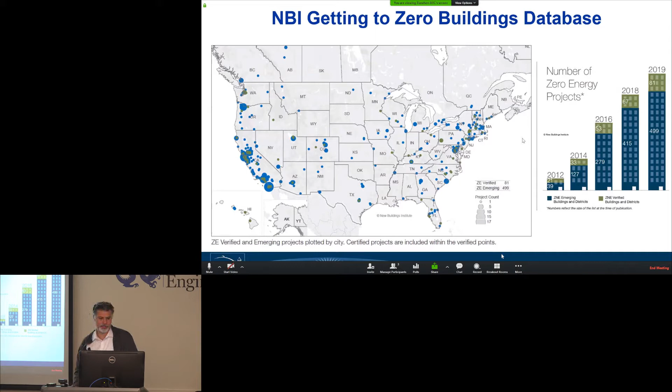So with that, I will hand it over to Dr. Hong. I realized I forgot to unmute myself, so he didn't hear anything of what I just said. Apologies. Does that mean the YouTube folks didn't hear that either, or did they hear it? YouTube heard it, okay. Dr. Hong, I apologize, I forgot to unmute myself when I did the introduction. So I just finished your introduction and you're up. If you will share your screen. Yes, let me do it. Okay, you're all set, I'll hand it over to you. We're not seeing your first slide though. There you go. Okay, it's all you.

Thank you for this opportunity. I'm Tianzhen from Berkeley Lab, and I'm happy today to share some of the research we've been working on for the last couple of years, focusing on how we get buildings in cities to be zero net energy. I'm sure there will be some questions and synergies between our research and the work Janet from NREL will be presenting later. These are funded mostly by Department of Energy's Building Technologies Office.

So if we look at the history, looking at the evolution of the built environment, you see some pictures here. If we start looking at the igloo, basically it's not electricity or natural gas, right? You still get energy from the sun, but it's really zero net energy. It's not a building per se, but it's like a shelter, right?

And then going down, you see a donut-shaped building. It's an ancient building in China. I think it's also using very less energy, using a lot of passive design, thermal mass.

But if we move ahead to the middle, the modern buildings, right? These have the vegetated green roof, very open space, try to use daylight and natural ventilation. So these are the high performance buildings, getting to the platinum or gold ratings.

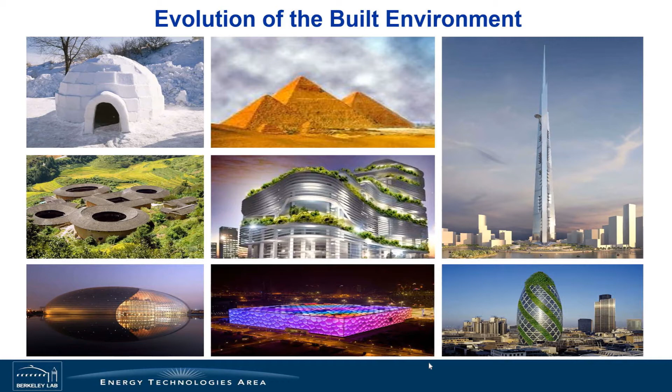So as you can see, buildings, all the shelters, evolve from very simple to very complicated, providing very sophisticated services for humans. And we are basically now asking the same question: can we design, operate these buildings in a net zero energy way, right? So that's a big question, and I think there's a lot of examples.

New buildings have been constructed and operated, actually achieving the zero net energy goal. This is a database compiled by New Buildings Institute, with data from 2012 all the way to 2019. Of course the 2019 data is not completed yet, but you can see there's almost 500 buildings, right, that achieve—or some maybe a couple of buildings together as a campus or district that achieve this zero net energy performance goal. So basically this is telling us it's a possibility.

It's for different building types across all the U.S. locations, different climates. And most of these are commercial buildings.

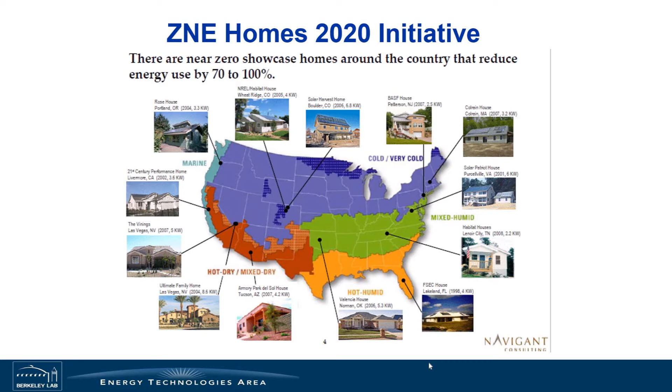So when we move to the residential buildings, right, Navigant also has been compiling a database of these new homes, either single family or multi-family, built across different climates in the country. And these are all zero net energy homes, right? So commercial, residential, we all have the examples, basically telling us that technologies are already here today, and we have those buildings.

But I guess the real challenge is, well, how can we scale them up? So take a step back, looking at a definition of zero net energy buildings.

And I think interesting things here, some are in common and some are differences. I think what's in common among the different definitions of ZNE buildings is they're all calculating the energy on an annual basis. So basically, we are saying a building is ZNE means the energy consumed, right, on the annual basis equals the energy produced on site, also on the annual basis, right? So that is all the common definitions.

But then when you go to the actual metrics, I think ASHRAE is using the site energy, which basically counts one equal unit of energy from all resources as equal, right? And the U.S. Department of Energy is using source energy, which basically values electricity at about 3 times the natural gas in terms of equal unit of energy.

In California, we are using time-dependent valuation energy. So basically it values every hour of energy differently, depending on whether it's commercial, residential, electricity or natural gas, and also varying by climate zone. So it's a more complicated metric, trying to consider some of the life cycle influence of energy.

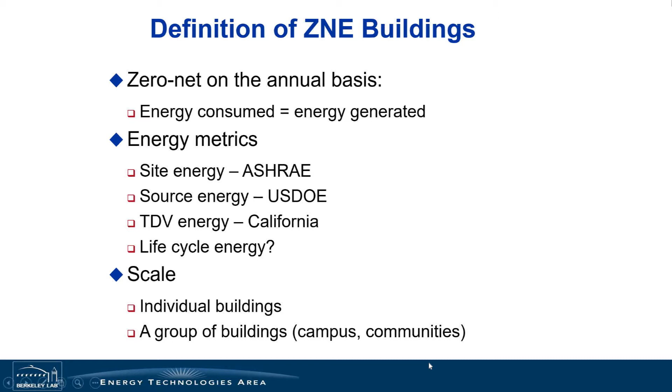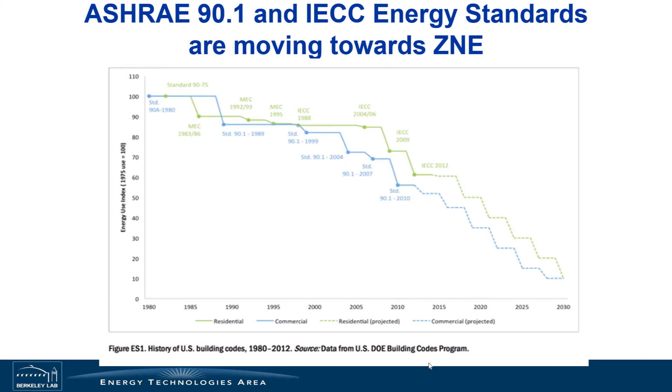On the residential side, the IECC is doing something similar. They're also tightening up the residential code to ensure that the code will get to the ZNE goal by 2030.

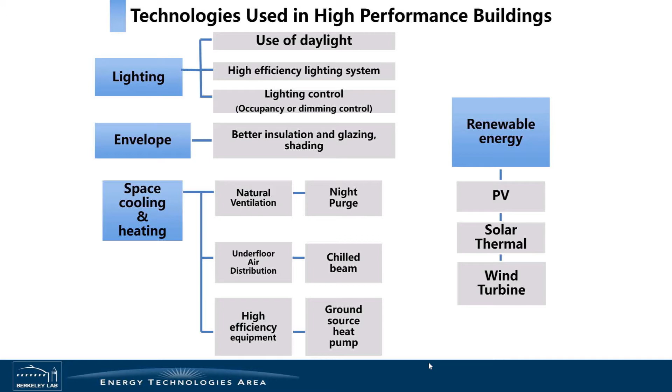I think these low energy cooling systems are quite popular in these kinds of high performance buildings. But of course, high efficiency HVAC equipment is also used, like high EER rooftop units or high COP chillers. On the renewable energy side, a lot of buildings are using solar photovoltaic, some are also using solar thermal, and some, with limited examples, use on-site wind turbines. So these are nothing new in terms of technology.

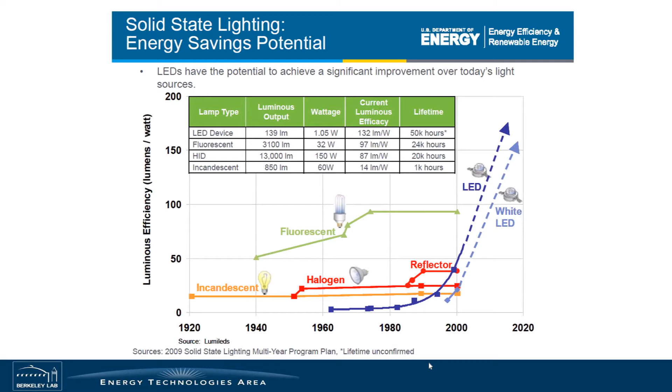On the HVAC side, this is just an example from Mr. Lee, an energy efficient engineer in Singapore. I think it illustrates very well the comparison between a conventional design and state-of-the-art design of a central chiller plant. The chiller efficiency in a conventional design may be 0.75 kW per ton, but today you can actually buy a chiller with better than 0.5 kW per ton. That's the technology.

Then for the air handling unit, this is more like the design of a low pressure loss air duct and fan system, so you can basically drop from 0.6 all the way down to 1/10, to 0.06. Same thing for the chill water pump, condenser water pump, and the cooling tower. The very bottom sums the total kilowatt per ton. Conventional design is about 1.75, and with state-of-the-art design we can get to 0.6. That's almost 1/3 of the conventional design, and this has already been implemented in many projects and real buildings. So it's just some dedicated engineering that enables us to have a much more energy efficient HVAC system - in this case, the central chiller plant.

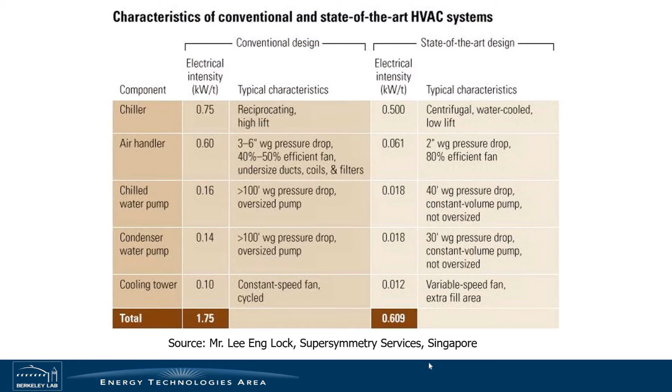The other perspective is that quite often in building design, these are different disciplines - lighting, architecture, HVAC, and daylighting - that seem to be done by different teams with very limited communication. I think the interactions between these disciplines are very important. So this new way of thinking in the design process is to use integrated design - basically getting everybody on the same project together, and considering interactions between all these different disciplines. One example: if you have a very high efficiency lighting system, obviously heat gain from the lighting will be much less, and that has implications on how you size HVAC systems, what type of HVAC systems to use. So this kind of interaction needs to be considered in order to optimize the entire building performance.

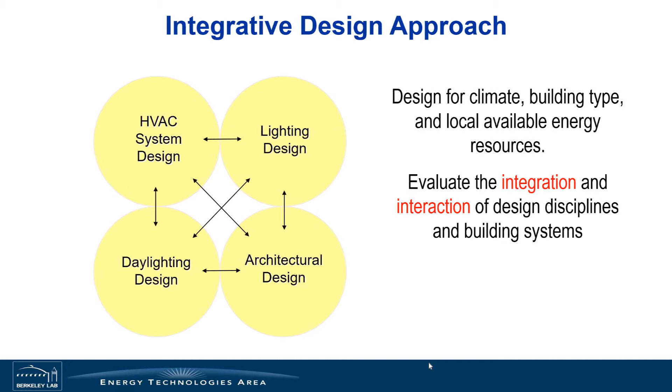Most of you may have already seen this diagram from the New Buildings Institute. Basically each dot is one building, and it compares the design energy use intensity with the actual measured energy use intensity. The dots are everywhere, but for most of them, on average, it's not too bad. But there's a right triangle highlighted here, and these basically are the low energy buildings we are pursuing. Unfortunately, for these buildings, the actual energy consumption is higher than the design, which poses a real challenge for us. How can we design these low energy buildings so that we can achieve the actual performance? So let's look at how these different factors influence the way we do energy modeling.

I think I just listed a couple of things here. The occupancy is important, how the building is operated and maintained. Earlier I mentioned occupants' behavior, the actual building controls, and the actual equipment performance, right? Equipment tends to have some sort of problems here and there, so that needs to be corrected, needs to be maintained, right? And weather data, what kind of weather data you use to do the simulation, right?

So are you using the year that you measure energy use? Sometimes that can be an important impact as well. And the last two things, yes, the way you make assumptions and simplifications to create the energy model, right? And also the tools you use to do the simulation, depending on how complicated your technology or your design is. The tool itself may have some approximation, sometimes there may be a bug somewhere.

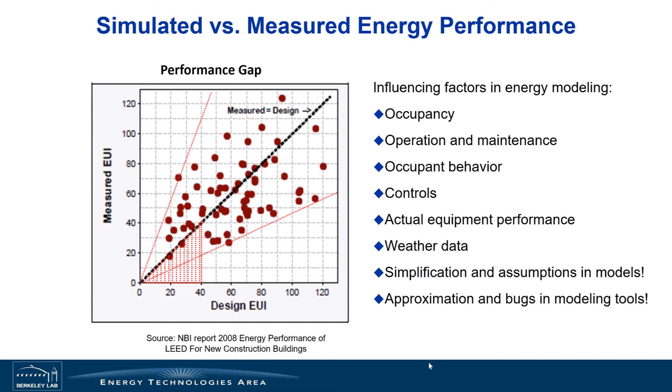So all these factors contribute to this performance gap, if you will. I think some we can easily find out and control. Some are a little bit more challenging. So to tackle some of these issues from the International Energy Agency's point of view, there have been a few projects that try to take a deep dive into some of those issues. And the first one is Annex 53.

So basically, you look at the actual energy performance, categorizing its influencing factors into six. There's climate, building envelope, building equipment, operation, maintenance, occupant behavior, and then there's also indoor environmental conditions. Buildings are operating with very different settings of indoor heating and cooling temperatures, right? And outdoor air ventilation rates. So those also have significant influence.

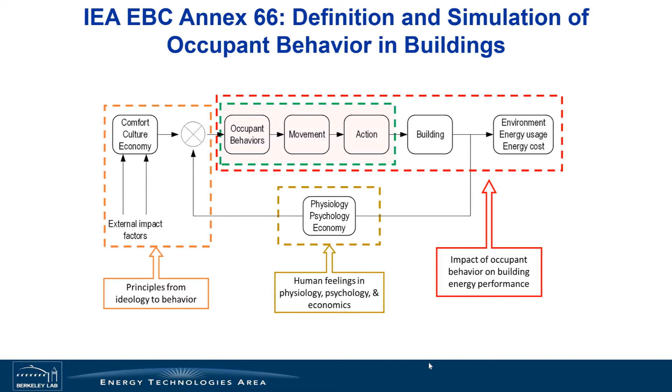So a more recently completed project is Annex 66. This is particularly focusing on occupant behavior in buildings. It tries to get data, tools, and develop some case studies and best practices to capture occupant behavior and integrate it in the way we simulate buildings' performance, and try to improve the way we evaluate technologies, considering how different people would interact with technology in different ways. So there's another IEA project.

So I want to have a couple of slides just to illustrate simulation's role in supporting the design of ZNE buildings. Simulation can be used in different phases of the building's life cycle, right? In the early design, it tries to inform some of the early design decisions, including the site, the geometry factors, and those kinds of stuff.

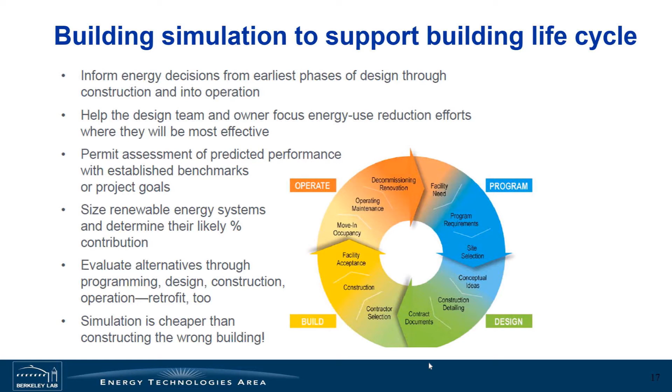And then going down to evaluate some of the system trade-offs, like system type, determining what kind of renewable energy, what kind of glazing system, right? For example, in the San Francisco microclimate, is double glazing always better than single glazing? Those kinds of design decisions can be evaluated early using energy modeling tools.

So as we are part of the National Lab of the Department of Energy, we have been working on this tool called EnergyPlus, and this is a national effort. NREL is also part of the team developing EnergyPlus. It's a tool used to calculate all the heat and airflow in buildings and simulate the energy performance, which is used for code compliance of new buildings, as well as evaluating technologies for retrofitting buildings to reduce energy use. It's a tool that has been there for the last 20 years.

So it's beyond just the total amount. It's about when the energy is consumed, that kind of flexibility. Can you consume more during certain times of the day and consume less during other times of the day? So that demand flexibility is now getting very important. Those are what some of our new research projects are focusing on.

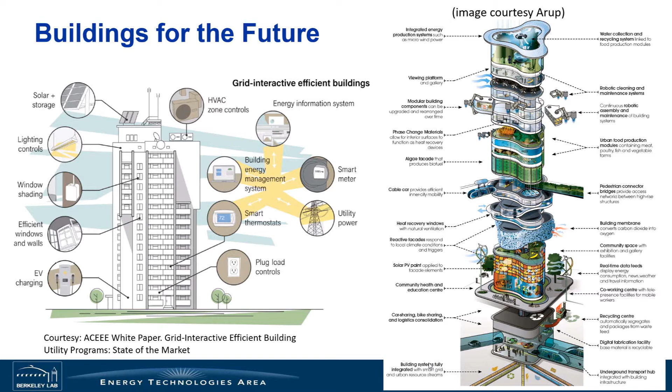On the right side, I think this is just an imagination of buildings in the future. It's more about a combination of different types of technology integrated with production of food, also transportation, integrated in a 3D dimension. I think it's very interesting thinking. So let me scale this up a little bit. So we're talking about one building, right?

But if we look at a city, right? So for example, New York City has 1 million buildings, so how can we do those kinds of energy retrofits or new designs, right? So there's a city energy profile project that basically looks at the energy consumption in cities. And as you can see, buildings consume a significant portion of the total city's energy, from 30% all the

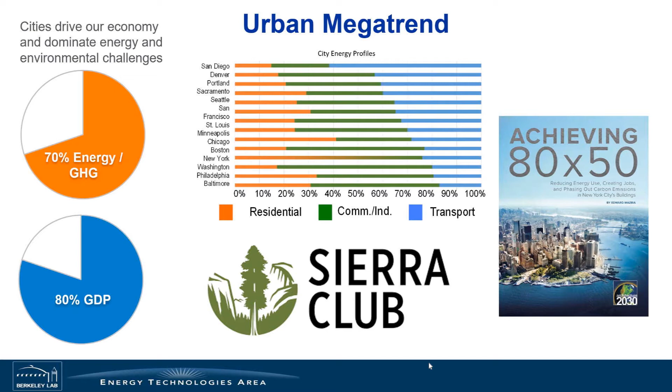way to 70%. Right, and so I think one of the key areas when cities talk about getting to 100% clean energy is to look at efficiency programs for the buildings sector, right? So there's a Sierra Club initiative; more and more cities are signing up for 100% clean energy by 2035 or 2040, right? Okay, so when we model buildings in an urban context, it's no longer just very simple and linear, where I model 2 buildings instead of 1.

I think one of the important sciences we are working on is looking at the interaction between buildings. If you're looking at a very dense area in a city, right, these are buildings on both sides of a narrow street. They have very strong interconnection in terms of solar shading, in terms of the long-wave radiation between those exterior surfaces. So we are considering this kind of interaction.

We are also considering how the building is connected to your local climate, right? Most of the time in simulation we're using the weather file from the airport, which can be far away, but your local climate can be very different. Sometimes we talk about it as an urban heat island. So we need to consider this.

And then from the other perspective, buildings also influence the microclimate, right? Buildings release heat through different channels, as illustrated in this figure here. There's convection through the building surfaces. Through the cooling towers, if you have one on the roof, through the rooftop unit, the exhaust air, and then of course there's also the exhaust air from spaces like kitchens, cooking, and some of the ventilation needs.

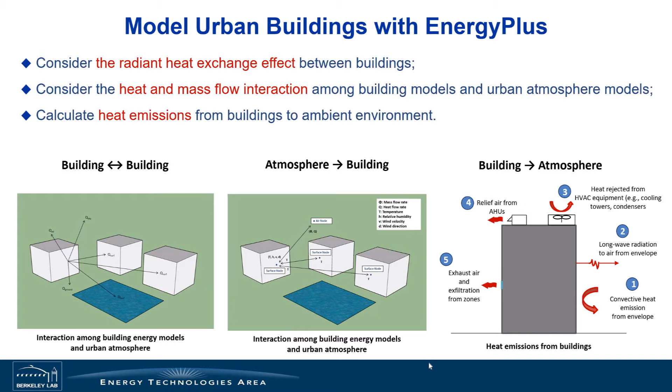So buildings release heat to the environment, which influences the environment's temperature and humidity, right? And vice versa, that further influences the energy demand in buildings. So it's this kind of interconnection we try to quantify in an urban environment. So we did some simple simulations to look at how strong this kind of impact is. And this is just a simple case study.

So this slide shows how we calculate heat emission from buildings, and we added this as a new feature to EnergyPlus. So now when you run EnergyPlus version 9.2, there's a summary report that reports all these heat emissions from buildings. And of course, it depends on the type of building. They have very different seasonal profiles. So I just want to highlight a couple of points in this particular slide.

So for a small office building, this is a single-story office building, right? The annual heat emission is 2,300 megajoules per square meter, and the site energy consumption is 621. So basically that is a factor of 3.7, which means for 1 unit of energy we consume in the building, we emit 3.7 units of heat to our environment. So it's a very significant factor.

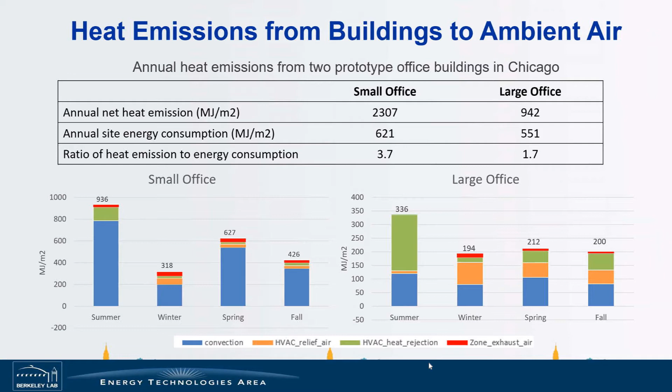So we have been working on a tool called CityBES, and this is basically trying to put all the data together to enable us to model every building in the city.

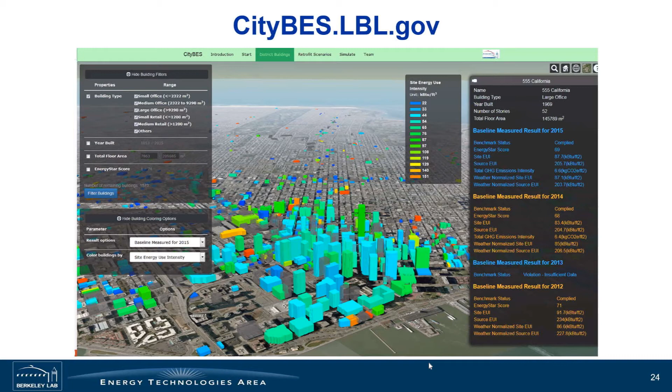So I think this approach is a little bit different than, later Janet will talk about how the ComStock and ResStock model buildings in cities. They just work for different use cases. So I'm going to give you a couple slides on this. So I think the first step is to create the building stock data for cities. And so I illustrate in this workflow, we try to get all the public domain data from cities.

There's a building footprint. I think the good thing is that Microsoft just released a public data set of building footprints for every building in the United States. So we're talking about almost 120 million buildings of footprint data, right? And then the detailed land use data about building type, vintage, number of stories, all the things, can be obtained from other data from the city.

Assessors records also sometimes have the data, and sometimes cities also have an energy disclosure program that has the actual energy consumption data for some of those buildings, public buildings or larger commercial buildings. So we basically massage the data, create a database, and standardize it using the DOE's BEDES. It's more like a data dictionary, right? Try to clarify the definition, and then produce the data in different formats to be used by different tools for different use cases.

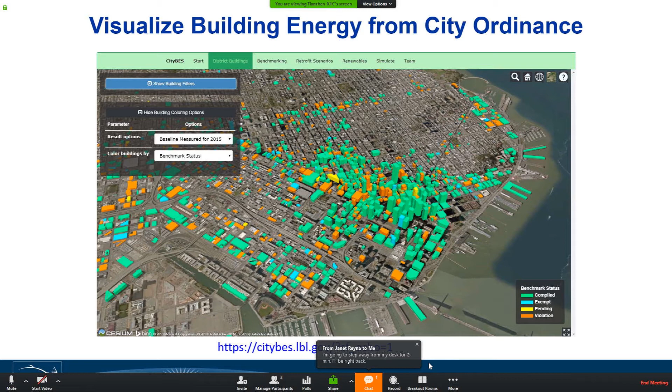So this kind of tool can then be used to visualize performance at a city scale. And this is just an example. We took San Francisco's disclosure data set. It's about 1,600 buildings, and this particular slide visualizes the compliance status. The orange color shows buildings that are still violating; they are not compliant yet. The green ones are those that have already complied. And so you can visualize different metrics. It depends on what kind of data you have.

We can then evaluate the solar photovoltaic potential at a city scale. So this shows about 9,000 buildings, and we took a look at different types of PV systems and also how much roof area is available for PV. You can do a quick assessment of how many kilowatt hours the rooftop PV can generate for this district or for the entire city, right? So you can color code by those things.

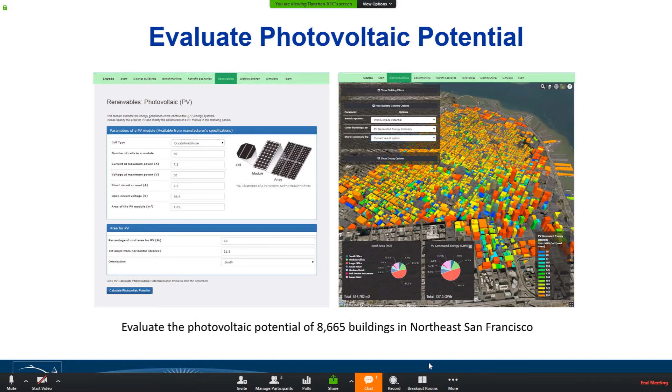And so in this kind of evaluation, I think the solar shading is very important. So we have the geometry data, so we basically consider the solar shading, right? If you have a building surrounded by many tall buildings, your roof is probably not going to receive a lot of solar. So those kinds of impacts, I think, need to be considered.

Install some plug-load controllers. Basically, turn off some of those monitors if nobody's in the office, right? Install occupancy sensors, and do some temperature set point changes, right? Not necessarily always require 24 degrees Celsius as the comfort temperature. If we can relax it to 25 degrees or even 26 degrees, there's a significant energy saving potential there.

And how about we install air-side economizers? Many old HVAC equipment don't have air-side economizers, but in the San Francisco climate, outdoor air most of the time is cool enough to provide free cooling. So if we retrofit those rooftop units to enable air-side economizers, I think there are significant savings you can get. So if we put all of the 6 measures together, these are within a payback of 5 years, we can see every building has a saving potential from 30% all the way to 50%, right?

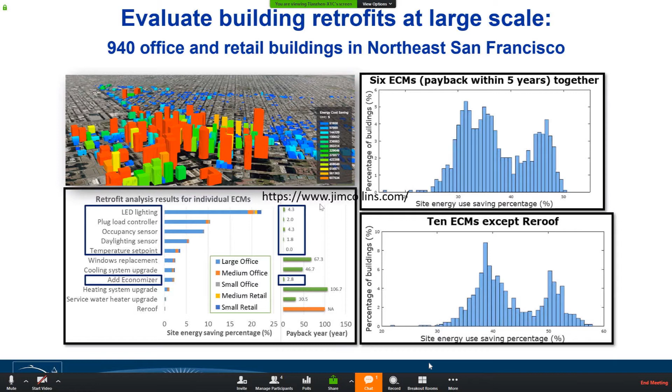So these technologies, if you think about it, are nothing new or fancy. So I think the technology is there. I think the other challenge is, beyond technology, to actually get the buildings in cities retrofitted to meet the current code or to significantly reduce energy use.

So I think this brings some interesting questions about when the city adopts the building code, how this kind of microclimate impact should be considered. That's the interest of San Francisco. I want to mention a project.

This is part of the Exascale computing project, and several labs work together. We try to look at all these different sectors in a city: transportation, buildings, urban climate, and how people make decisions. The idea is to quantify these interconnections.

Earlier I illustrated buildings release heat to the environment, and the environment influences buildings' energy demand. Transportation is similar, right? Transportation moves people around, but also generates pollutants and heat to cities. So how that should be considered.

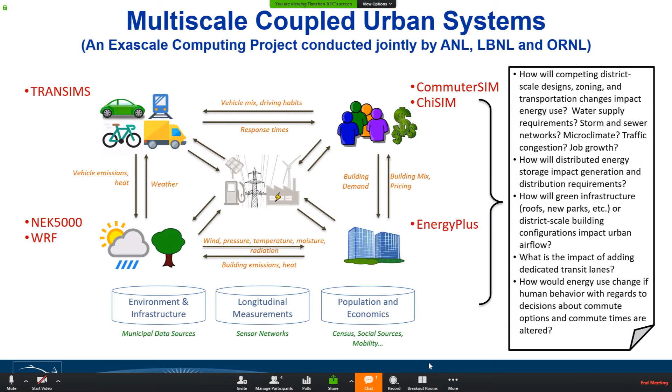Especially now we also have electric vehicles that may add charging loads to the building in a very dynamic way. So how these kinds of interactions should be considered, which is important when we're thinking about urban planning. We will try to create a new district - what's the infrastructure needs for this new district?

So the last slide, this is just something very new. It's ACEEE, and the European ECEEE, and also India's AEEE, just came up with this report looking at energy efficiency from a global perspective.

Buildings consume 31%, industry 29%, transportation 29%. So they recommended these 12 strategies for us to do something meaningful to scale up our efficiency to the global scale. And if you look at the list, most of these are things we already talked about, and the challenge is still there. A lot of it is probably beyond just the technology itself - it's about policy, business model, and how we motivate people and building owners to do it.

So I will stop here.

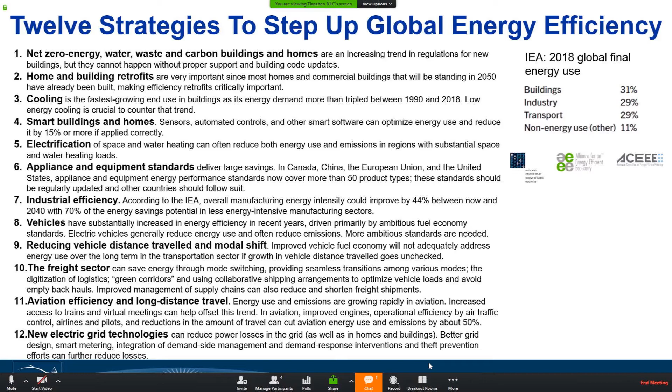Okay, thank you. So we'll take questions if there's any questions from the audience, or if there's any questions online. Oh, am I still muted? No. I have a question. Go ahead. Are you going to repeat it to him? Yeah, if you speak up, he might be able to hear, but if not, I'll repeat.

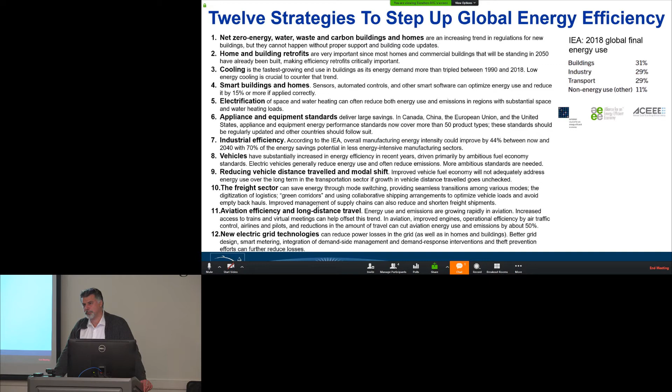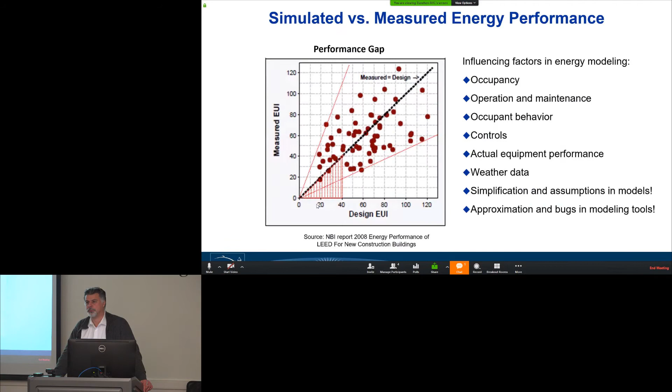Okay, so in the very beginning when he gave that comparison between the buildings in the US, China, Europe or the EU, and then Asia, without China, I suppose, it seemed as though the technologies that they were looking at that were presented for high-performance buildings were ones that would rather favor more temperate climates. And I'm curious as to where these buildings are located in those regions, to see whether these results could be something that could be applicable to a place like here where we don't have a mild climate.

Were you able to hear the question? Yes. Yeah, I think that's a very good question. So these are definitely buildings in different climates. So the impact of climate, I think, definitely is a factor. But more important, I think, is the other factors that influence the energy consumption. Some of the data here shows basically in the same region, and they consume still very different amounts of energy.

So what we found out from comparing buildings in China and buildings in the US, the energy consumption is almost different by a factor of 2. We have more advanced energy efficiency technologies and equipment installed, but what we found is that we tend to run our equipment for much longer time, and some we even don't turn off, even though nobody is there. And we also condition the entire building, with lower cooling temperature and higher heating temperature.

So while we look at China, I think they don't have as efficient technologies as us, but they operate the buildings in a much more efficient way. Every day, at the end of the day, they have operators run around to every room and turn off lights, turn off whatever equipment is not needed. And then you get a much wider comfort temperature range. So these are a few other things - operation, people's behavior - that make the actual energy consumption very different.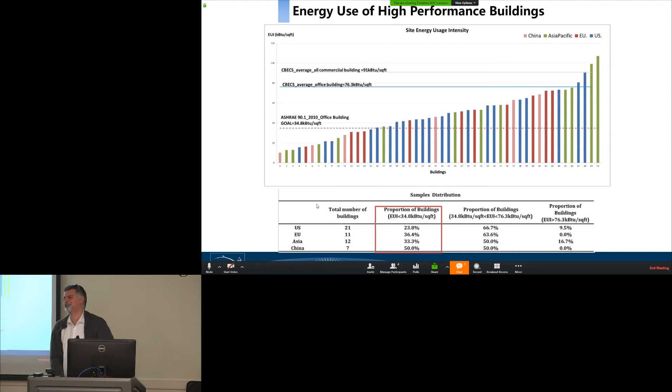But my question is about the City Building Energy Saver and access to the tool - if anyone can use it. You gave examples of San Francisco and looking at a large retrofit program, how much energy could be saved. I'm just curious, for Philadelphia, if we could do that kind of modeling with this tool.

Thank you for bringing that up. So the process we work with is cities and consultants basically try to put the data together and upload to the platform, and then that can be used. We're developing data for 1,000 cities, a few in California, but also New York City, Chicago, and I believe Washington D.C. and Boston. If you're interested, we definitely can find a time to chat with you. It's our interest to get the tool platform used by as many people as possible, and it's provided free.

Awesome. Yeah, because we have a benchmarking program here in the city, so we have a lot of data already to go from. Yeah, that would be good to have a follow-up chat.

Can I ask a question, going back to the beginning of your presentation where you talked about the different energy metrics and briefly mentioned the life cycle assessment? One of the questions I ask myself a lot when people talk about net zero buildings is how much they're really just talking about operations of the building. If I were to expand the control volume to include the sourcing of materials required to build high performance buildings, transport of that material to the site, and the ultimate decommissioning and disposal of the building, does that blow this argument out of the water? In other words, does the full life cycle of construction of high performance buildings make it really not look so net zero at the end of the day?

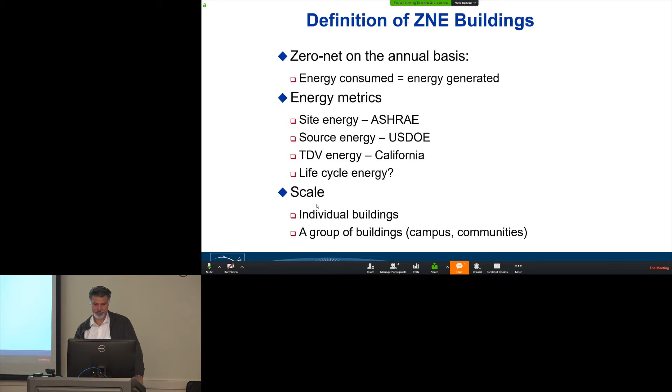Okay, I think we should be able to hear you. Although I can't hear you yet. Not hearing you. It helps if I unmuted myself. Ah, there you go, go ahead and share your screen. Okay, let me, can you see it? I'm just trying to minimize the... oops, what did I do? Sorry, messed up, oh no. Should I get rid of that? Oh, enter full screen. There we go, it might be on my end. No, that was on us. Oh, that's the wrong one, isn't it? Yeah, swap, there you go. Okay, perfect, you're up, okay.

Well, thank you very much for the opportunity to come and speak with you all. Today I'm going to be talking about two different tools that have been developed at NREL for the modeling of the residential stock and modeling of the commercial stock. Before I get into that, I want to give a little bit of motivation for why we care about modeling the stock and the important things we want to be capturing in our modeling.

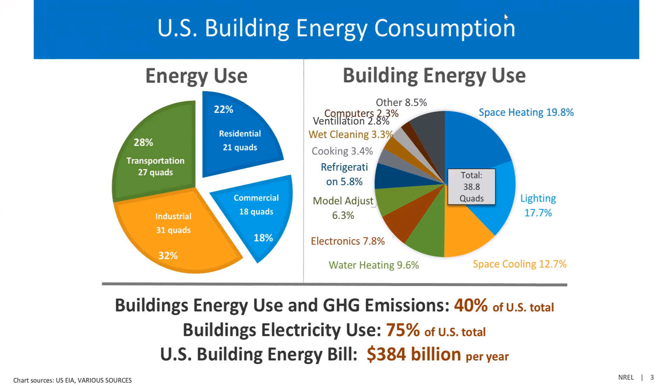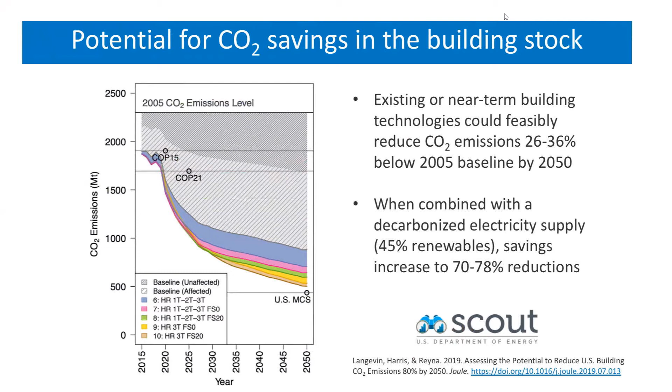However, if we were to combine that with a decarbonization of the electricity supply, remembering that buildings consume 75% of electricity, plus we were pushing fuel switching, increasing the fraction of energy consumed in the building as electricity, we can actually get to nearly 80% savings in our most aggressive scenario. So all this is to say that there's huge potential for savings across different technologies in the building stock in the U.S.

And this isn't only about the technology of the stock itself. There are lots of factors that go into this: the mix of building types, the climate, the technologies deployed, the fuel mixes, the behavior, many different things. But it's important to remember that the opportunities for greenhouse gas savings are not equally distributed across the country.

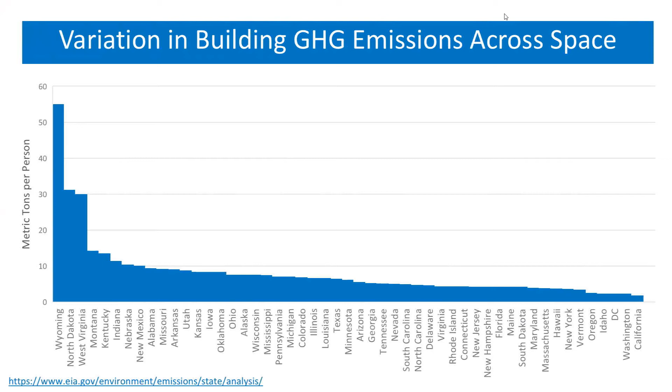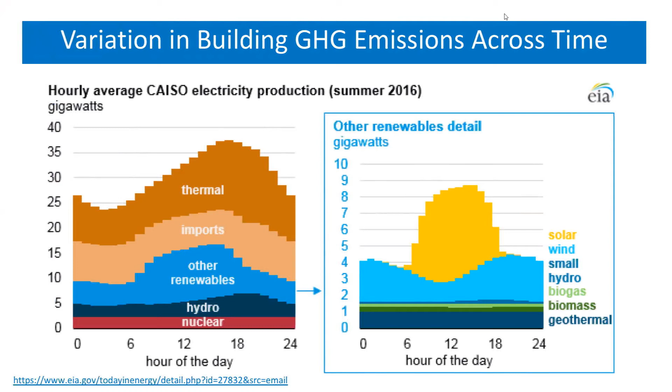So in order to decarbonize buildings, we really need to understand many different things: where energy demand is happening, when energy demand is happening, how it varies by different building types, technology types, fuel types, and also the timing of different energy efficiency measures.

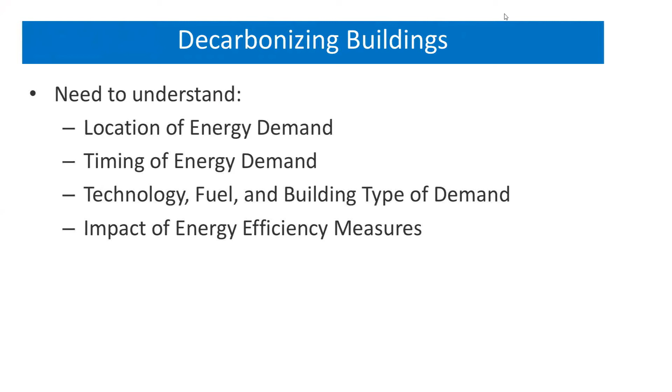If I was to upgrade, let's say, the washing machine in my home to a more efficient model, I might be able to do some back-of-the-envelope calculation in terms of the energy savings based on the rating of the washer. However, what is the actual carbon savings from that? Looking at the electricity demand needed to run the washing machine, it's going to vary a lot depending upon my behavior, my location, and many other things. At an aggregate level across the country, this isn't something we necessarily have a good understanding of—what these different time-sensitive savings actually are.

So now I'm going to talk a little bit about ResStock and ComStock and what we're doing, kind of going from the nationwide down, trying to understand some of these regional differences in energy consumption.

ResStock and ComStock are models of the residential and commercial building sectors, respectively, in the United States. They use physics-based energy models to model the whole stock. This is a traditional approach used for maybe 15-20 years: you create a prototypical model, like for 1970s single-family homes, then map all buildings of that type in the country to the prototype and scale up to get a national total. ResStock and ComStock do a version of this, but more sophisticated, using a suite of different prototypes instead of just one archetype to represent a whole segment.

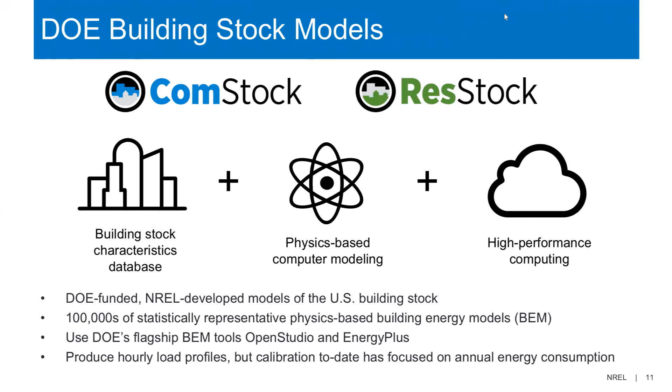So as opposed to using maybe 30 prototypes to represent the country, we're using hundreds of thousands of individual models. ResStock and ComStock are DOE-funded, NREL-developed models of the U.S. building stock. We use OpenStudio and EnergyPlus under the hood, for many different types of buildings throughout the country. One advantage of EnergyPlus is that we get hourly or even 15-minute outputs if we want them. Our calibration to date has focused on getting annual totals right, but we're increasingly moving toward time series calibration, which I'll talk about in a bit.

So our approach is to develop a highly granular model that allows for nationwide totals, as well as looking at local and regional differences.

The first thing we do in developing the models is put together a nationwide characteristic database. I'm using ResStock as an example here—full disclosure, I work on the residential buildings team, so this will be a bit more slanted toward ResStock than ComStock. We use a wide range of data available on the U.S. housing stock, from home builder surveys, the American Community Survey, large-scale residential energy consumption surveys, and weather data, piecing these together to develop a database we can sample from to represent the U.S. building stock.

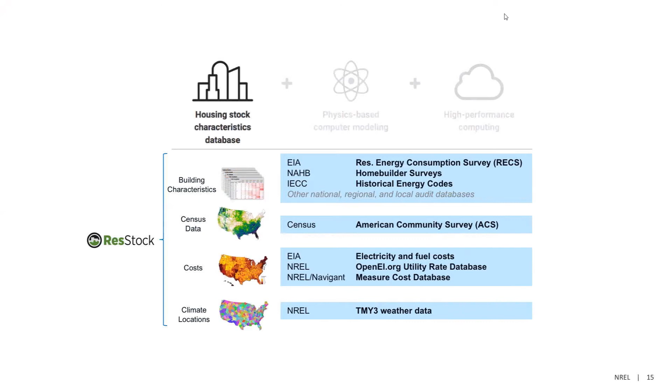Oh no. Can you all hear me? Sorry, I think I might have lost connection for a second. Can you still see my slides? Okay, let me try that again. Okay, how's that? Okay, great.

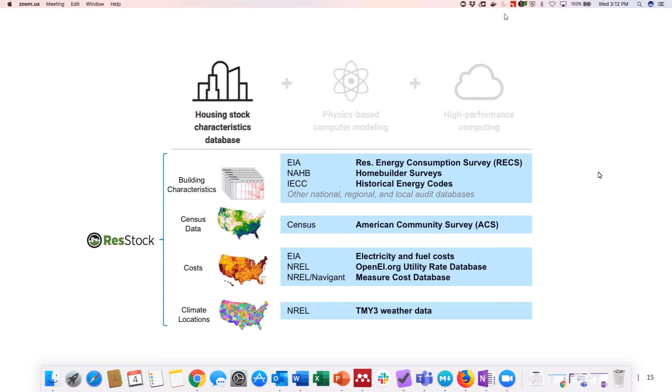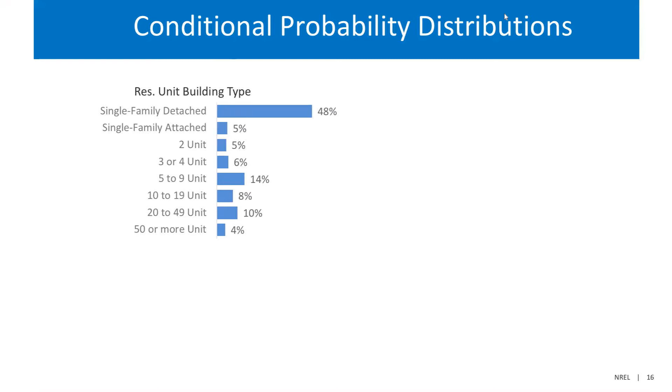So we developed this database of the housing stock. What does this look like? For example, this might show the breakdown across the country of different residential building types: 48% single-family detached, with various breakdowns of single-family attached and multifamily. We get a probability distribution of a single building falling within any one category. Taking the single-family detached portion, we then have a distribution of where these buildings are located. For example, the Mid-Atlantic region has 8% of single-family homes in the U.S., and we can break that down further by vintage, continuing step by step to build networks of conditional probability distributions representing the entire residential stock.

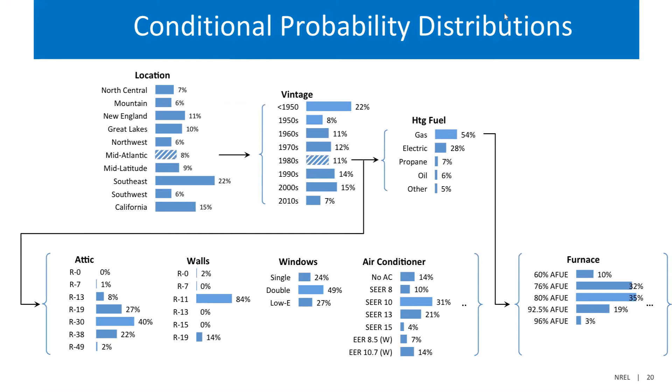And this is just a sampling of them—we have about 150 different inputs to the model that make up these distributions. Once we have these conditional probability distributions built out, we can sample from them.

So using the example we just had, if we were to develop a building that is a 1980s Mid-Atlantic single-family home, the most typical combination would be a gas heating fuel, R30 attic, R11 walls, double pane windows, SEER 10 air conditioner, and 80% AFUE furnace. So this is the most typical. If we were doing a more traditional archetypical approach, this would just represent that whole segment of the stock.

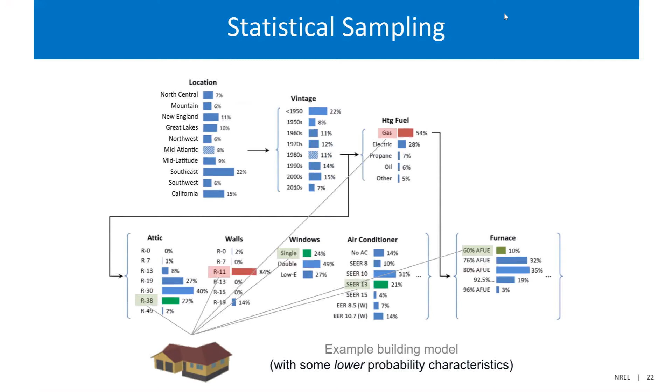But what we actually do is we do a whole bunch of different samples. So we might get a case that is not the most common or most high probability. That's why we do hundreds of thousands of samples so that we're able to fully capture the distribution that exists within the stock. So once we sample from these characteristics, we have a set of about 350,000 building characteristics, each one that represents a single home.

We have a supercomputer at NREL that we typically use for our simulations. For the residential stock, just to do single family homes, it's about 350,000 EnergyPlus models to represent the whole US. If we were then to take that stock and do different upgrades, asking questions like, what if we were to upgrade a certain portion of insulation in homes across the US, what would that look like? If we were to do 50 different upgrades and explore the nationwide impacts, it actually goes up to 20 million different simulations and almost 2.5 years of computing time.

We also have workflows developed to use cloud computing for this, in addition to our supercomputer here. And we're working to develop those further so that this is a tool that's easier for those outside the lab to be able to use.

One thing that we've been thinking a lot about: ResStock and ComStock were initially developed as nationwide models, but there's a lot of potential for doing citywide analysis. Last year, we partnered with New York City to write a support document about what a city would actually need to do to prepare for a city scale analysis. NREL has already contracted with one city to do a city scale analysis that I'm going to talk about next.

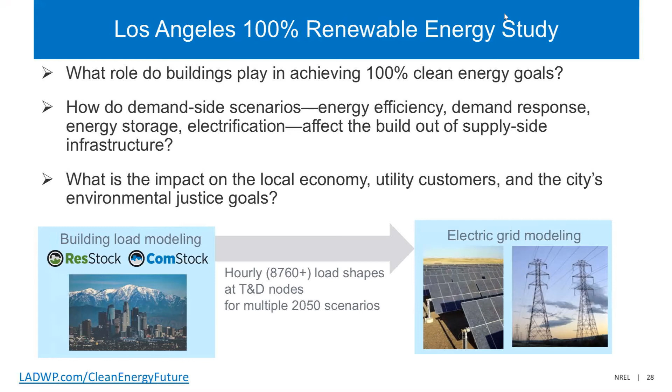But for our portion, we used ResStock and ComStock to generate hourly load shapes, so 8,760 hourly points per year all the way through 2050 for some different scenarios. So how do we go about this?

So as I mentioned, with the housing characteristics, conditional dependencies that I broke down a little bit, we basically went through and instead of using US national data, we started pulling in California and Los Angeles specific data, information from the LA assessor on their building stock, some of their different GIS data portal information, basically wherever we could to update our representation of the housing stock to match what happened in LA.

California is a unique situation that they have their own building surveys that were really useful for developing some of these characteristics. They have a specific survey focused on the residential stock of California, even down selected to LADWP specifically. But wherever we could, we went through and we tried to update our national level characteristics to represent the LA stock.

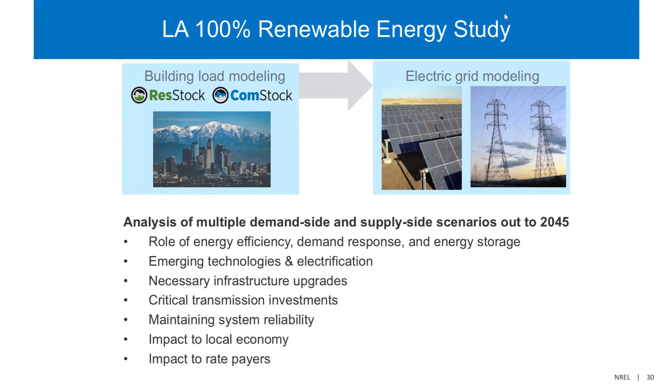And as I mentioned, we developed multiple demand-side scenarios going forward, and other portions of the NREL team developed supply-side scenarios as well to kind of look at some of the different things that were in play. But before we could get to developing some of these future scenarios, the first thing we did was take a look at how we built out this characteristic database of buildings in LA, and we ran it for 2012 and compared it to the real data, just to see how we were doing when we started off.

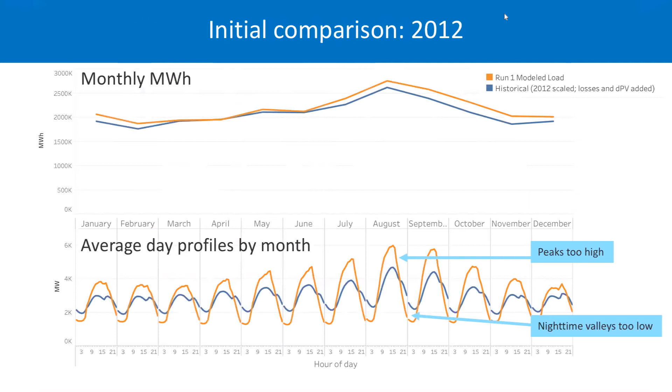So you can see we were a little bit too high during the day, a little bit too low at night. So we had some work to do to try to true up our models and identify those discrepancies. One of the things we did during the calibration process is we ended up using 2016 load research data, which is LADWP's research that suggests that this is what they think their 2016 load actually was.

LADWP does not have advanced metering infrastructure in every single building. They have a small subset. So what they have is monthly billing data, that's the ground truth data that they have. But they do have this LRD load research data where they've gone out and done a small sample of buildings that they think represent it, and they scale it up to the total load.

So we used this LRD data in 2016 as our ground truth to train the model and do the calibration. We then tested it in 2017. And then we also did a portion of validation off of the monthly customer billing data. Because LADWP is obviously interested in the load shapes for doing 100% renewable energy studies, since they're interested in knowing when demand is happening. But the billing data is a good validation for the years that we have it to make sure that we are getting the aggregate totals right.

So I think I mentioned this, we used the LRD data, we used the customer billing data. There was also a small subset of LADWP that has advanced metering infrastructure, which is 15-minute metered data at the individual building level. It's not very much of their service territory, but we used it for a comparison where we had it. It's also not a statistically representative sample of the city, so we couldn't just scale it up and say, here's LADWP's profile.

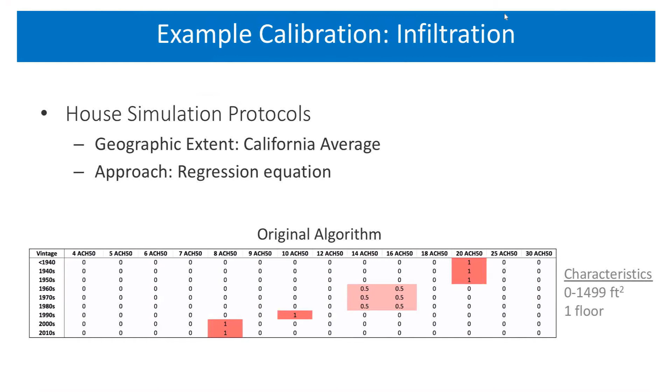When you're looking at national totals, maybe less important. But when we were drilling down to LA specific, we needed something that had more detail. So we ended up remodeling this using an envelope leakage tool for LA specifically. And then we were able to take those distributions and update the infiltration. As you can see, it covers a much wider range of the infiltration space, and ended up being something really important in our models. So we were able to update this.

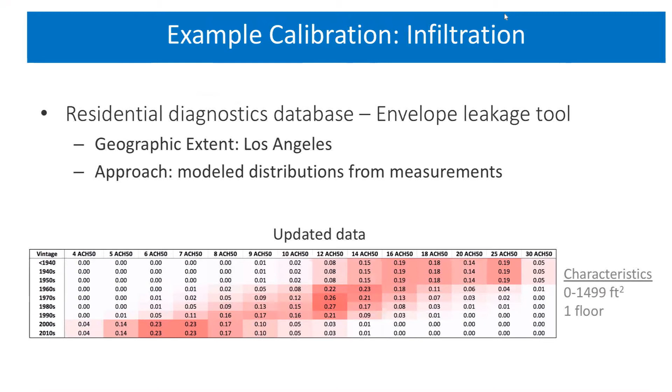I do have to say we had some interesting surprises during the calibration. There were factors that were LA specific that ended up being really important for LA that are not necessarily important nationwide. Two of the things that were biggest surprises for us that we had to get right was pool energy consumption. There's a high number of pools in LA, and for the homes that have them, they're really high energy consumption. We look across the whole country, there's overall not that high a fraction of homes with pools. But because of the pool density in LA, getting the pool heating and pool pump schedules correct was really important.

Another thing that became a big surprise to us is holiday lights were really important in LA. And it's one of the things that we had to actually add on to our models to account for correctly, because it was not something captured by our lighting module previously.

So once we have the calibrated baseline, we then developed projections of 2015 through 2045. So we did this period to go into the future, and we did a range of different load cases. So we did a reference, which was supposed to be existing and near-term technologies, things we knew were coming up in the building code in California. Then we did a moderate. This was both moderate energy efficiency and moderate electrification of different end uses.

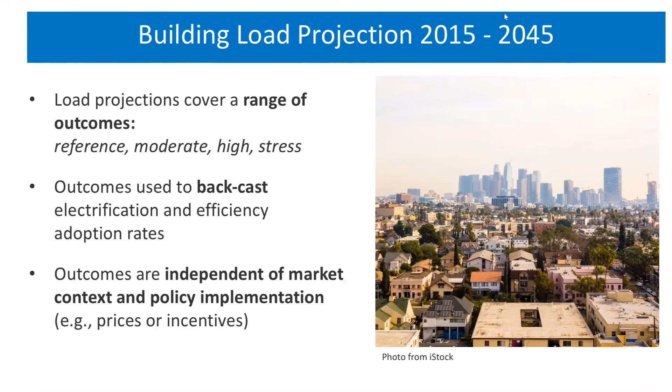One of the things we had to be responsive to as well, LA came out with their Green New Deal midway through this project, which mandates for buildings to be net carbon neutral by 2050. That's a little bit open to interpretation, how you want to think about what net carbon neutral is. We assumed it was for 100% electrification of the building stock. We weren't assuming any other accounting mechanisms that allowed natural gas to stay. So for our high electrification case, we were trying to get to 100% electrified by the end, assuming that you couldn't be burning natural gas in the building and be net carbon neutral.

So how do we actually go about doing these projections? So we had 3 different parts of this forecasting module.

The first model was actually based on growth of the building stock—what are the retirement rates, what are the growth rates. We used projections on population from the California Department of Finance primarily to feed this, as well as population estimates from the American Community Survey to model the turnover of buildings within the stock.

We then put in our electrification goals for different scenarios. For the reference case, it was basically no electrification. For moderate, it was kind of what we considered low-hanging fruit electrification. And for the stress and high case, it was pushing to 100% where we could by the end of the period. There were a few technologies we really struggled to get into the stock in time because we were replacing them basically at the end of life of the different equipment.

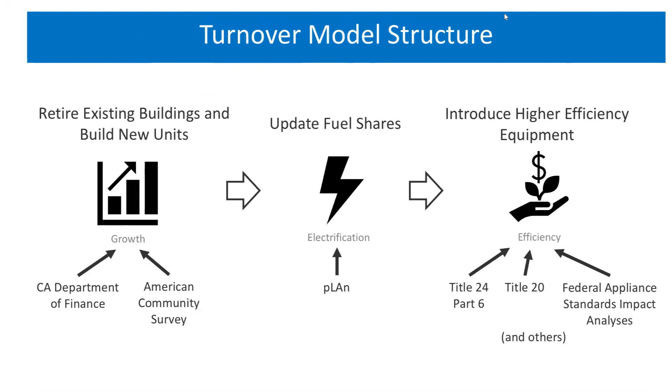On top of that, we had another piece of the model doing efficiency upgrades—some near-term ones based on what currently exists in Title 24, the California Building Code, and Title 20, the California Appliance Standards, as well as federal appliance standards. We also did more aggressive cases for the moderate and high scenarios, bumping it up beyond what we believed were the near-term changes.

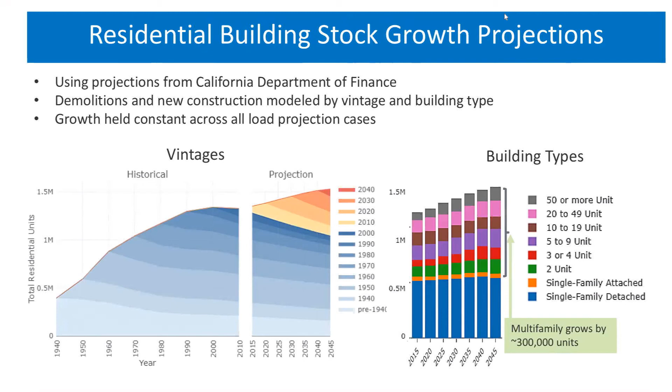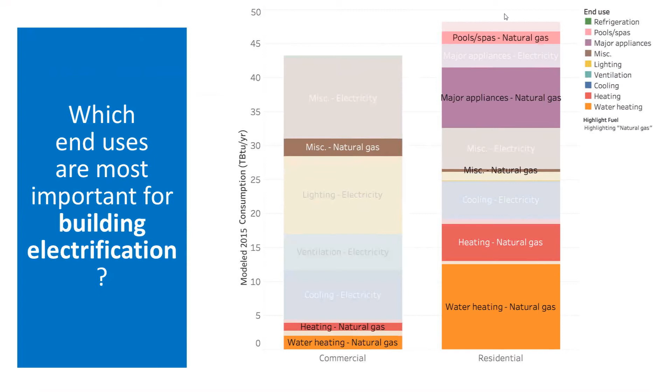For electrification, these are the different end uses within buildings. For commercial, we considered miscellaneous natural gas loads, heating natural gas, and water heating natural gas. For residential, we considered pools, major appliances—primarily cooking ranges and dryers—space heating, and water heating.

So this is a sample of one of the electrification scenarios—cooking ranges for residential stock. The orange here is the fraction that's electric, and the blue is the fraction that's natural gas. On the left-hand graph, you're seeing the actual sales.

As I mentioned, the way we got equipment into the stock was based on the natural turnover of the equipment. EIA reports the average lifetime of different equipment, and we use that as our typical. So if a cooking range lasts on average 15 years, at the end of 15 years we had a replacement based on these sales we were projecting. On the right, based on that lifetime turnover, here's what actually gets installed into the stock. For cooking ranges, we got to 100% electric pretty readily by 2045, assuming that all sales go electric by 2030. That was the only way we could get some of these technologies into the stock.

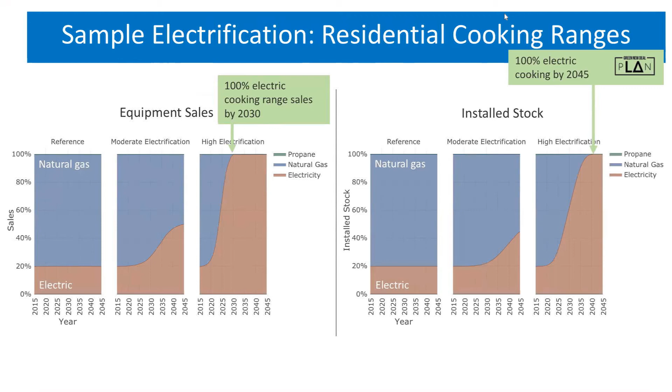We actually struggled with electrification of some things like space heating, because natural gas space heating equipment lasts quite long, on average around 22 years. So getting to 100% electric by the end of the study period was really difficult, because we were assuming sales couldn't go 100% electric within the next 5 years or so. We didn't quite make it for some of those, which is caveated in some of our results.

Unfortunately, the study is not finalized, so I cannot show you any official results. We're hoping that we'll be able to start publishing on those in the next year or so.

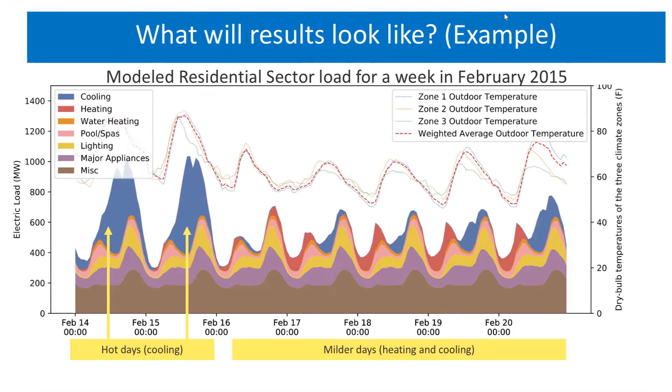This is to give you an example of what some of the results of the study are going to look like. So here's a week in February 2015 that we modeled. You can see it's broken down by different end uses. We have outdoor air temperatures, and we know different zone temperatures for the building. This is just for a week, and you see some of the variations in load, and what's driving that. We're going to have this for both the residential and commercial stock all the way through 2045 for each of those different scenarios, so that our grid modeling team and LADWP are able to explore what different building efficiency and electrification features look like, and the implications for how they'll need to build out their grid to meet those.

So again, stay tuned. Study results are not yet public. The building loads are more or less complete, but other portions of the project are still ongoing, and hopefully those will be out sometime in the next year. You'll start seeing some of those results then.

I'm also going to talk about another ongoing project that we're doing with ResStock. Tianzhen's actually a team member on this project as well, but it's being led out of NREL, and we have a website for this project if you'd like to go and take a look. The aim of this project is modeling end-use load profiles for the United States.

So what is an end-use load profile? End-use load profiles describe how and when energy is used. It's similar to what I was just showing you for the LA specific model, but it's more generalized in how energy is going to be used. For example, back to my clothes washers example, it would tell me if you were to upgrade a certain portion of clothes washers in the United States, when you would see the savings and what that would look like in terms of time-sensitive savings.

So this has a lot of different applications. Utilities are especially interested in this. A lot of utility cost is driven by the worst couple of hours a year, and if they were able to shave off some of the demand at those hours, there are huge implications in terms of how much they have to build out their system and the cost savings. So they are very interested in understanding what are the different end uses driving that peak, and what end uses are driving demand at different times of day.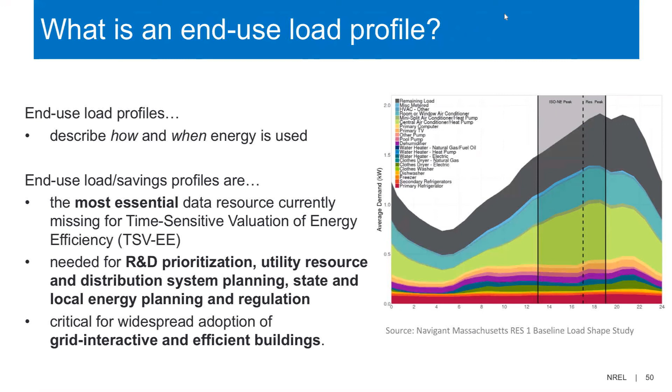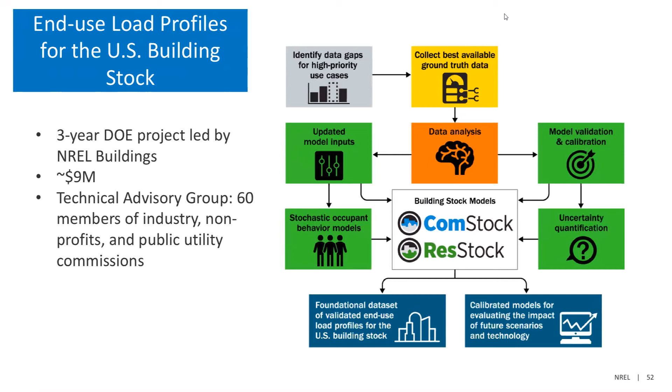So this project is to address that gap. It's a 3-year DOE project led by NREL Buildings, about $9 million. We have 60 different advisory members from industry, nonprofits, and public utility commissions who are advising us as we develop these profiles. Our project team is composed of NREL, as well as LBNL and Argonne National Laboratories. We're also partnered with NEEP, Northeast Energy Efficiency Partnerships, as well as ASHRAE.

So some of the challenges in developing these types of load profiles. Why don't these things already exist for large portions of the US? Traditionally, they've been done by taking a representative sample of buildings, going in and installing sub-meters for each of the different end uses within the building, monitoring them for a year, and then scaling it up to represent a whole region. This has been done predominantly in the Pacific Northwest. There are some that exist for the Northeast as well. The problem with this approach is that it's extremely expensive to go and actually meter each of these buildings.

So the opportunity of this project is to do a hybrid approach by using meter data where we have it, by using AMI data where we have it, and calibrating the ResStock and ComStock models in a time series way, which hasn't been done as much before outside of Los Angeles, to develop these profiles using the model. One of the advantages of this approach is that then you can run different scenarios of savings. It's not part of the scope of this project, but something we're thinking about for the future.

So this project will produce end-use load profiles by region, by actual end use—water heating, HVAC, appliances, et cetera—and by building type, which is especially important for the commercial building sector that has many different types of buildings with very different use profiles.

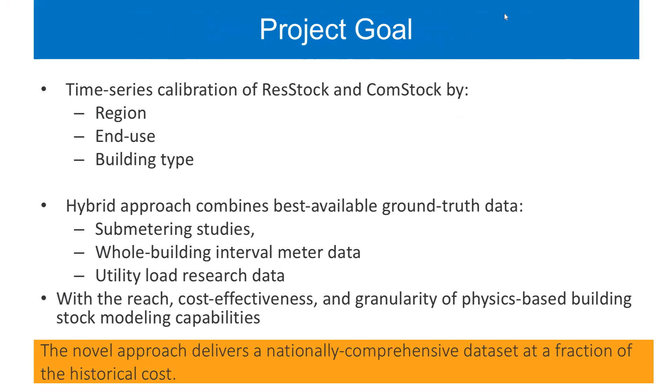One of the other advantages of the way that we're modeling this is I mentioned ResStock does hundreds of thousands of simulations. So as opposed to getting some sort of average, like here's electric water heating consumption in single family homes in, let's say, Denver, we're actually able to look at each of the different buildings and how they contribute to that aggregate, and also look at the variation that exists building to building. So it's actually a really unique thing.

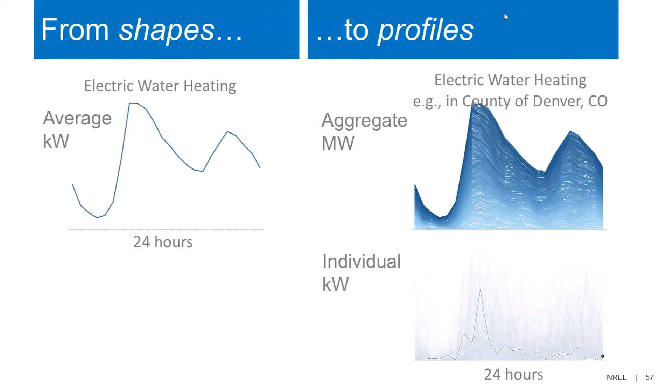And the more detailed you get spatially, so if you look not just at the whole utility level but start looking at the feeder level, understanding the variability in that individual profile becomes increasingly important. That's something we'll get as a byproduct of the way that we're doing the modeling. For example, we can trace it down to an individual building within each of those profiles.

Some of the goals of this are to have our results at 15-minute resolution for a whole year. Where possible, we're trying to provide results at the utility territory level. And we're focusing on real power, not reactive power, for this project.

We are one year into the project right now. We've just released our first year one report, if you're interested in checking that out for what we've already done to date.

So I mentioned we're using a variety of different data sources for calibrating. I touched on some of this with the LA project. One of the data sources we didn't have for LA that we're pursuing heavily is a large comprehensive AMI, which is 15-minute building level data for whole utility territories. Not all utilities have this, but where they do, it's really helpful for us in being able to calibrate not just the aggregate total of our stock model, but the diversity across different buildings.

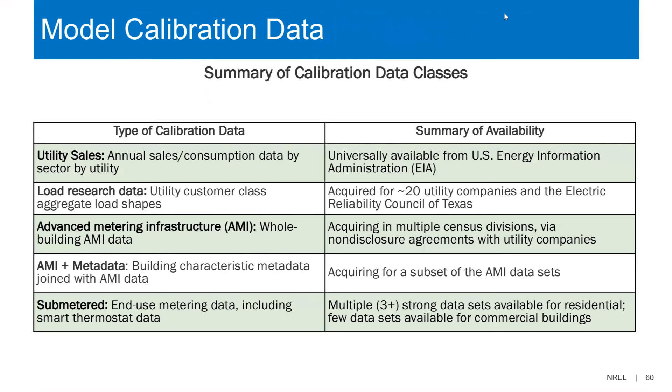We're also benchmarking against utility sales data reported to EIA every year, load research data where we have it, and sometimes sub-meter data. Pacific Northwest has strong sub-meter data sets, and there's a couple scattered throughout the US that we'll use where possible.

So to give a quick example, we might take load research data with all of the different customer class profiles and slice our model to try to match that. For example, a lot of LRD data will give not just residential total, but residential homes that have electric heat and those that don't, and we try as much as possible to match that.

For some utilities, for example ComEd, we do have their entire AMI data set, so for all 4 million buildings in Northern Illinois at 30-minute intervals. And so we're able to go through and use that in doing the diversity of the stock.

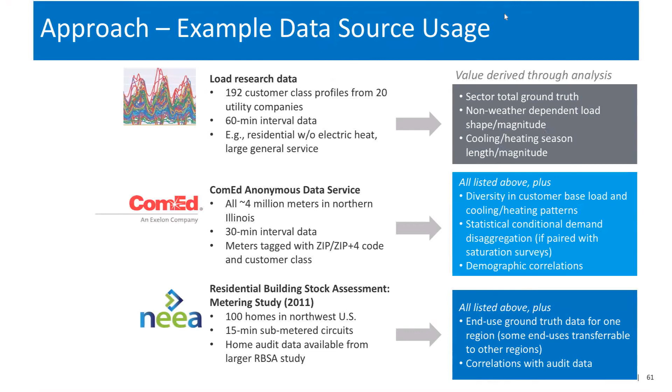We're also using NEEA's 2011 study, which is a sub-metering study, so we actually know things at the end use level.

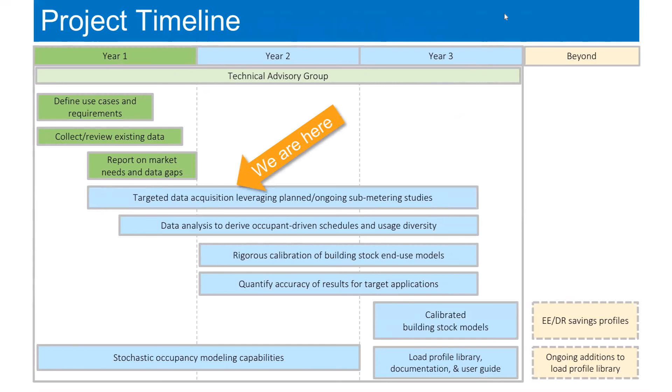As I mentioned, we're just starting the second year of this project. We spent the first year collecting data, figuring out requirements from different stakeholders, and we're really just now starting to dive into the calibration of the models as part of this.

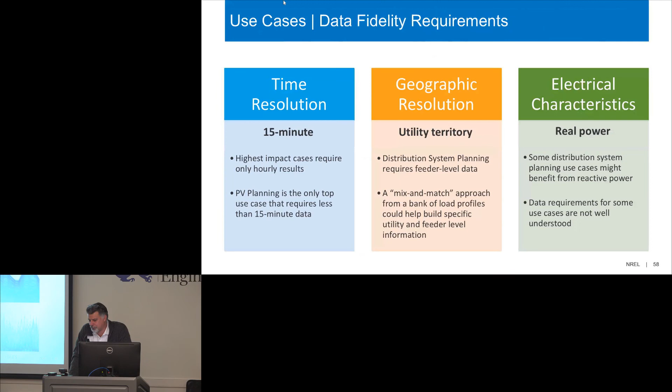Just in view of the IPCC special report on 1.5 degrees, you're getting up to 2045, which is around the point where we need to be net zero globally. To me, those assumptions about behavior—we kind of have to challenge them if we're going to take that goal seriously. In other words, I wonder if the answer to this question starts to change as you go further in the future. Right now, sure, let your range go to the end of its useful life. But if you buy one next year, the urgency with which you might be asked to replace it could get greater, I guess.

Yeah, and I agree with you—from a climate change perspective, these things should be happening faster. In the context of this project, our client was LADWP, and they're interested in what's realistic. Barring any major incentive from the utility or some policy that comes out in California or LA mandating these, lifetime is probably when things are going to be replaced. So I would completely agree, from a climate perspective things are more dire and probably should be considered. But in terms of developing something responsive to actual things that might happen, lifetime is where we landed.

Related to that discussion, in Pennsylvania, or Philadelphia specifically, we have a ton of natural gas and a ton of natural gas money. In Philadelphia, we own the natural gas utility. So are either of the presenters aware of innovative solutions to electrify space heating and water heating systems more quickly than we're on track? We're not on track to do anything that I'm aware of. So we need to move on that based on what you're saying about climate change—we need to move quickly, and we need to steal some ideas or find some ideas in other places to move our policymakers along.

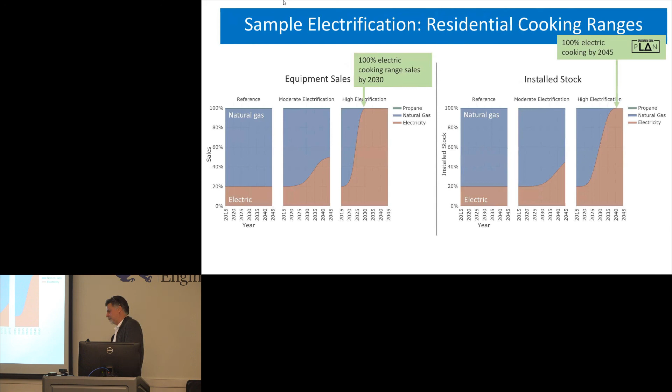I'm not sure if there's a silver bullet mechanism right now for what electrification should look like. In the graph I showed at the very beginning, in the study of carbon reduction potential, we struggled to get enough electrification into the stock to achieve the carbon reductions we wanted without some sort of fuel switching credit. The long strings of scenarios with FS at the end—FS0 was no credit, FS20 was like 20% capital credit. So within our model, capital cost credit was what it took to get people to switch, because electricity is more expensive than natural gas within this model. Some cities in California are putting in electrification mandates. It'll be interesting to see how this plays out. I don't know if Tianzhen has comments on the one happening in Berkeley.

But I'm not sure there's necessarily, you know, ready set, like this is the pathway to do electrification, because it's complicated, especially with natural gas companies involved, and also thinking about equity issues in terms of fuel poverty in cold regions, that you're putting a burden on homeowners or renters that might already spend large portions of their income on natural gas, switching to electricity. There's a lot of potential things to navigate in that space. So I don't know, Tianzhen, if you have any comments on some of the electrification mandates.

Yeah, I think it's fuel switching. I think it's a very controversial issue in California. I think some cities like Berkeley are more aggressive, and that requires any new building to not use natural gas. And I think maybe San Francisco will follow, but statewide, I think there's a lot of debate on how soon and how the mandate should work.

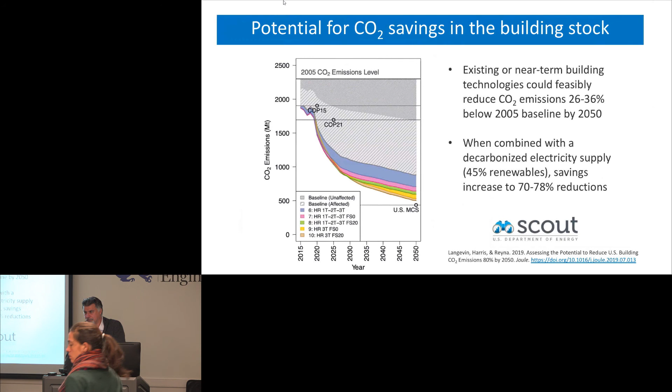Another question? Okay. I've got an oil furnace and I found out about a gas line. From a carbon point of view, does it make sense to put in a gas furnace? Right now, the cost is much less than the oil, but ignore the money value. Does it make that much difference to the environment? From an emissions perspective. Emissions perspective, yeah. Ignoring the cost of oil versus gas. So forgetting about the cost of oil versus gas, if you had an oil-based furnace in a house, does it make sense to replace it with gas right now from a climate perspective? Probably in the near-term climate perspective, yes. The better option would probably be going electric because of the lifespan of that technology and the potential for the electric grid to decarbonize in the future.